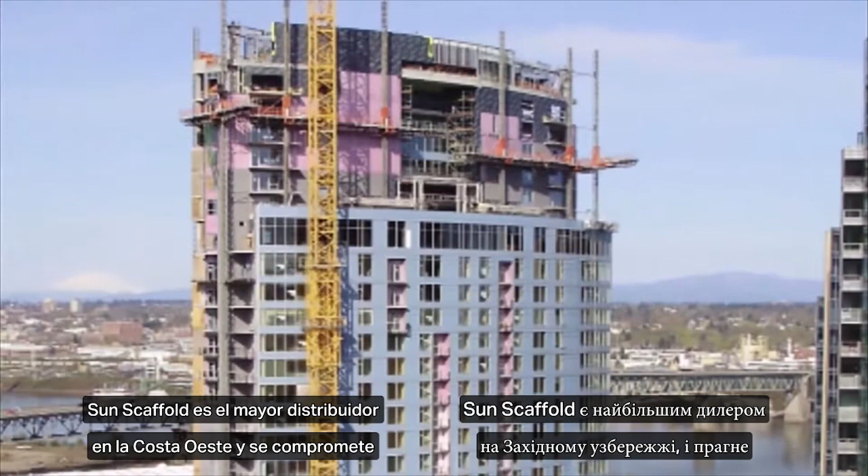Thank you for participating in our Level 1 user training for FRACO mast climbing work platform. Sun Scaffold is the largest dealer on the West Coast and is committed to increasing our safety trainings on an ongoing basis. Whether this is a review or your first exposure to mast climbing work platforms, please help us to train you to be a safer and more experienced, competent worker by focusing your attention to the following training videos.

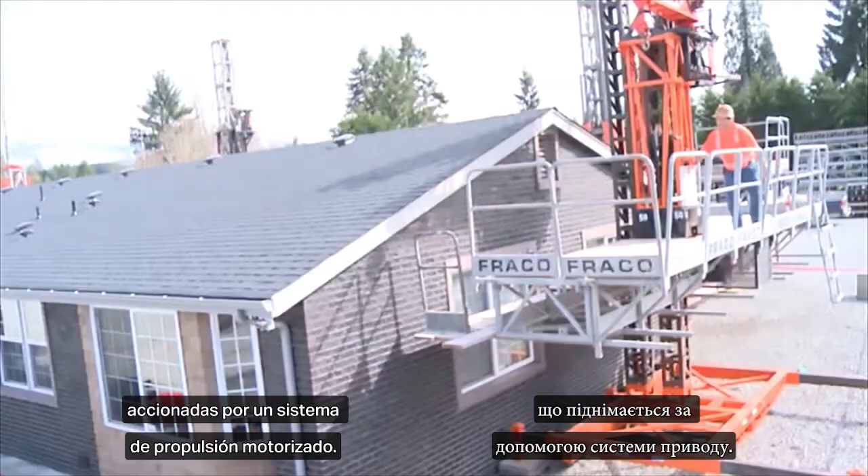Mast climbing work platforms are a single elevation platform elevated by a powered drive system. The drive system is supported and guided by a mast that may or may not require a lateral restraint from a separate supporting structure. Mast climbing work platforms are primarily used to position and give safe access to personnel along with their necessary tools and material to perform their work.

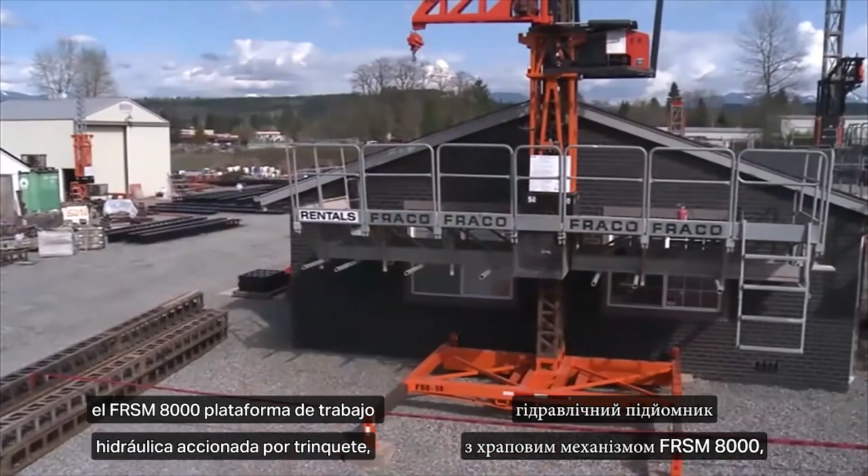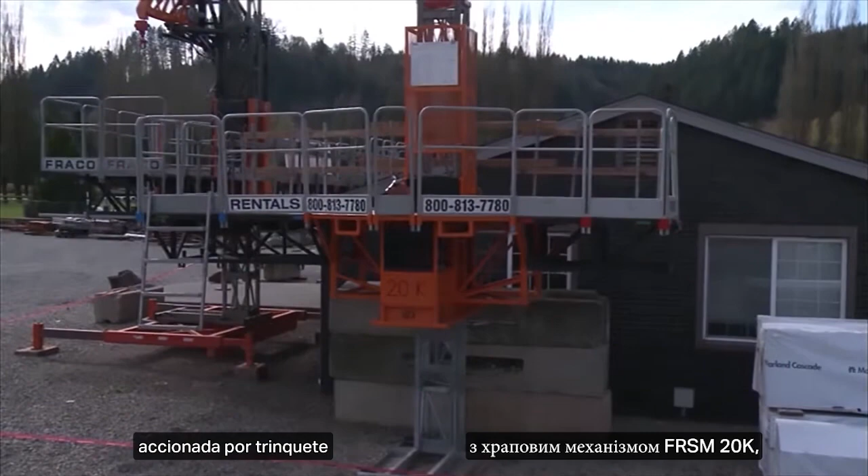The product models you will be trained on today are the FRSM 8000 ratchet-driven hydraulic work platform, the FRSM 20K ratchet-driven hydraulic work platform, and the ACT-8 endless screw-driven hydraulic work platform.

The FRSM 8000 is driven by a hydraulic motor, powered by a detachable gasoline engine pack. It climbs a 12-inch by 12-inch mast with twin ratcheting hydraulic ram sets. The power, drive, and safety release systems are all operated manually.

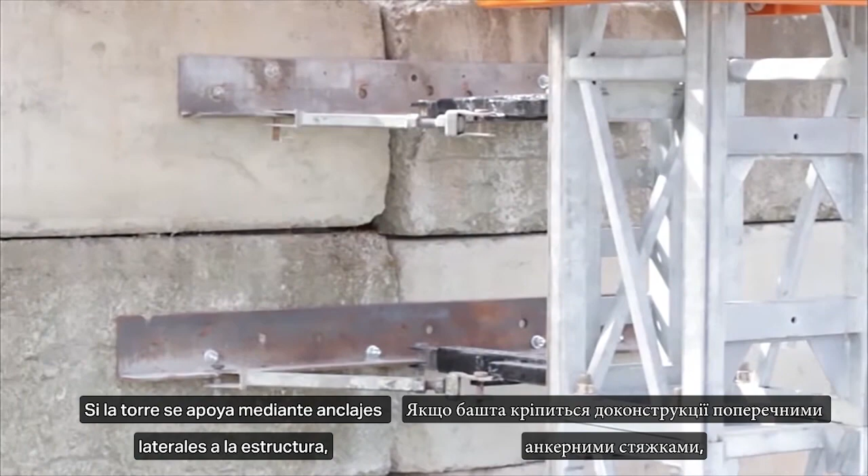The 12-inch by 12-inch by 10-foot mast sections can be coupled together to achieve a 34-foot freestanding configuration. If the tower is supported by lateral anchor ties into the structure, the mast section can be left as a single 12-inch by 12-inch by 10-foot mast. The FRSM 8000 configurations are limited to 36 foot wide for single mast configuration and 105 foot wide for twin mast configuration.

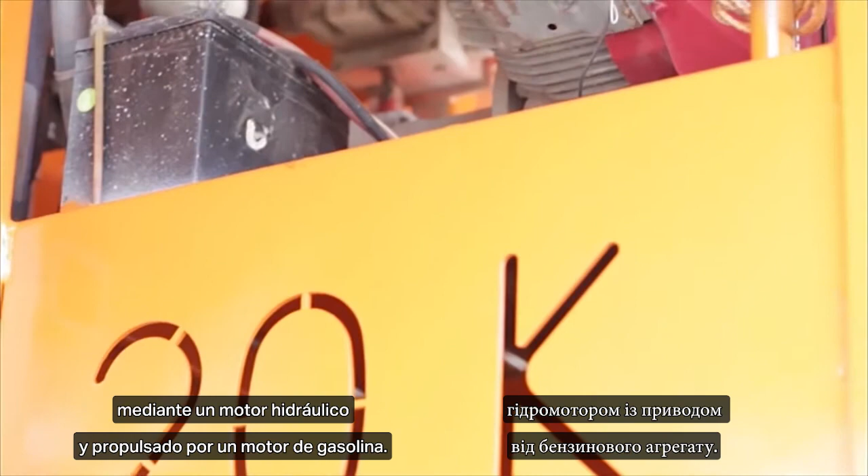The FRSM 20K is driven by a hydraulic motor and powered by a gasoline engine. It climbs a 20-inch by 20-inch mast with a single ratcheting hydraulic ram set. The power, drive, and safety release systems are operated with a combination of manual, combustion, and electrical components.

The 20-inch by 20-inch by 5-foot mast sections allow typical configurations to achieve a 45-foot freestanding height. The configurations are limited to 47 feet wide for single mast and approximately 127 feet for twin mast configurations.

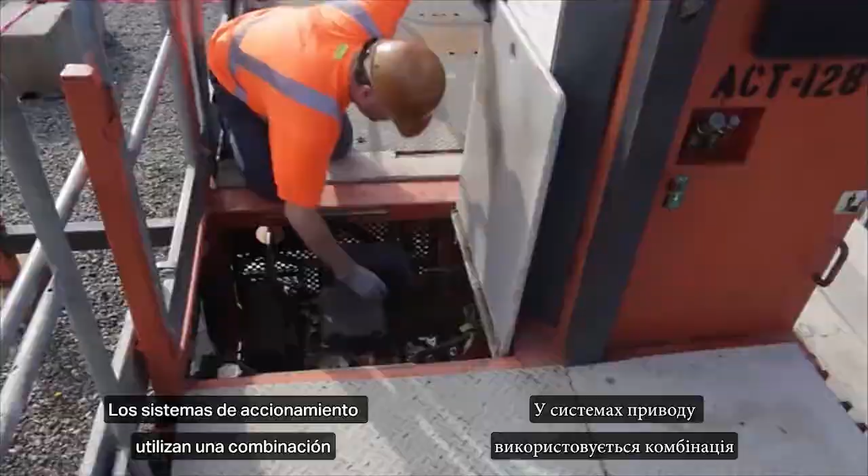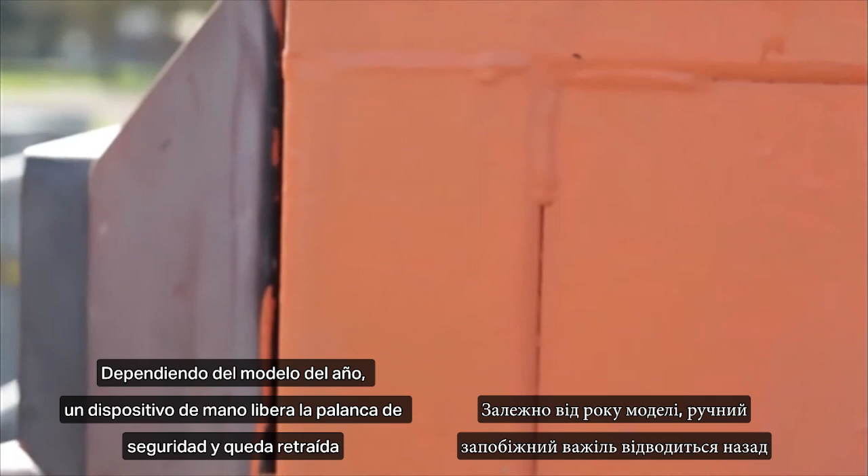The ACT-128 is a gear-driven machine that climbs or descends at a maximum speed of 39 feet per minute. The drive systems utilize a combination of gasoline, hydraulic, and electrical components. Depending upon the year model, a handheld safety release lever is retracted and held into position during the descent mode.

The 20-inch by 20-inch by 5-foot mast sections allow typical configurations to achieve a 45-foot freestanding height. The configurations are limited to 56 feet wide for single mast configurations and 118 feet wide for twin mast configurations.

This Level 1 user training certification will require all trainees to read and speak clear English. If a trainee requires training in a different language, please see the instructor and he will make arrangements for you to attend a bilingual class at a later time.

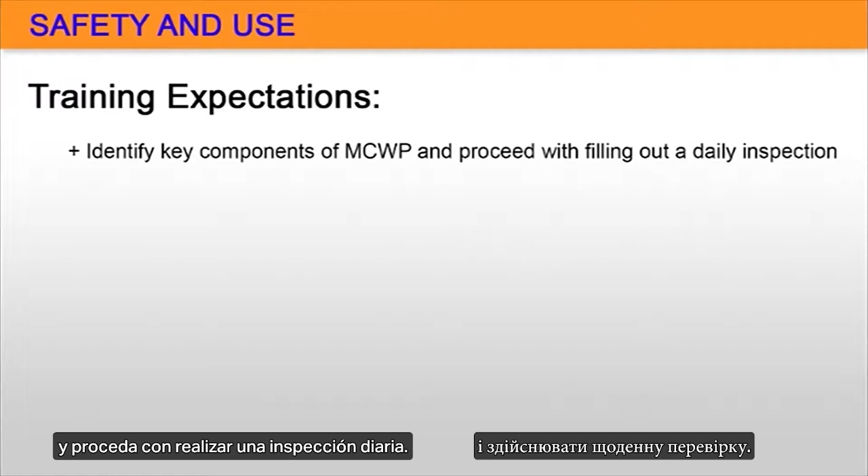This certification will require classroom training, knowledge and possession of the manual information, hands-on training, and a written test. You must pass the test with a 70% grade or higher. As part of this training, you will be expected to know and identify key components of the mast climbing work platform and proceed with filling out a daily inspection.

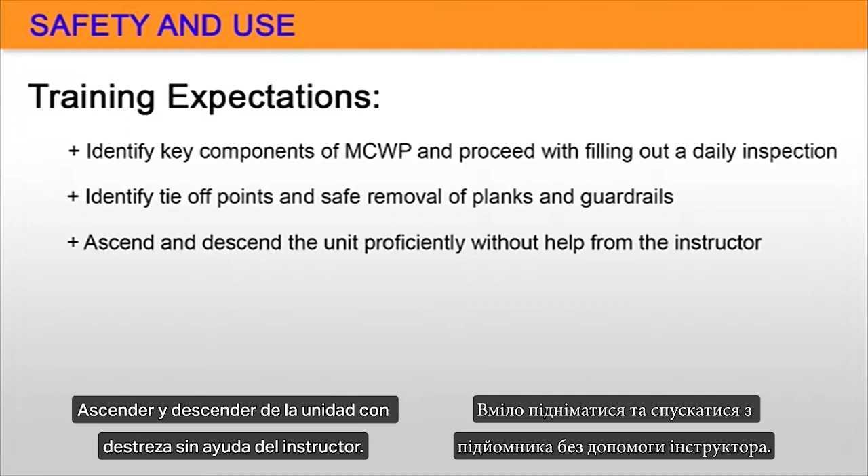Identify the tie-off points and safe removal of planks and guardrails. Ascend and descend the unit proficiently without help from the instructor. Operate the available accessories. Identify the location of the warning panel, and demonstrate the use of the emergency safety descent device when applicable.

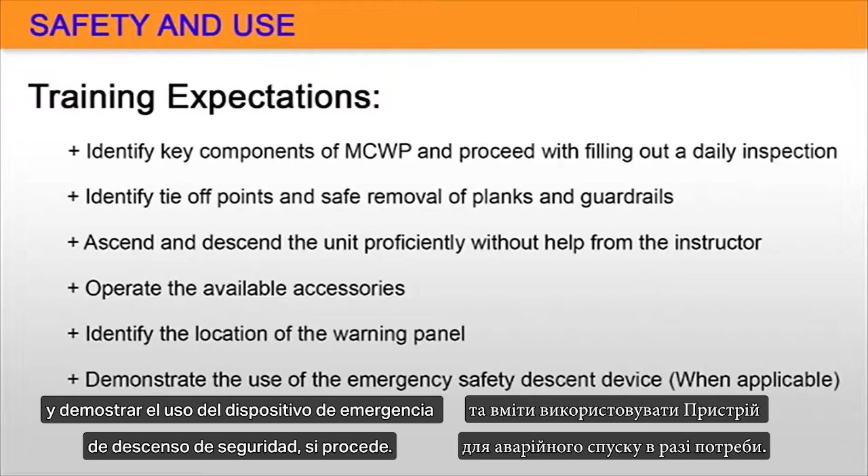Whether you use or operate a mast climbing work platform, everyone should know the definition of and act as a competent person. No alterations or mechanical repairs can be made without proper certification. Each job site will have a qualified person to contact in the case of equipment alterations, damage, or repair.

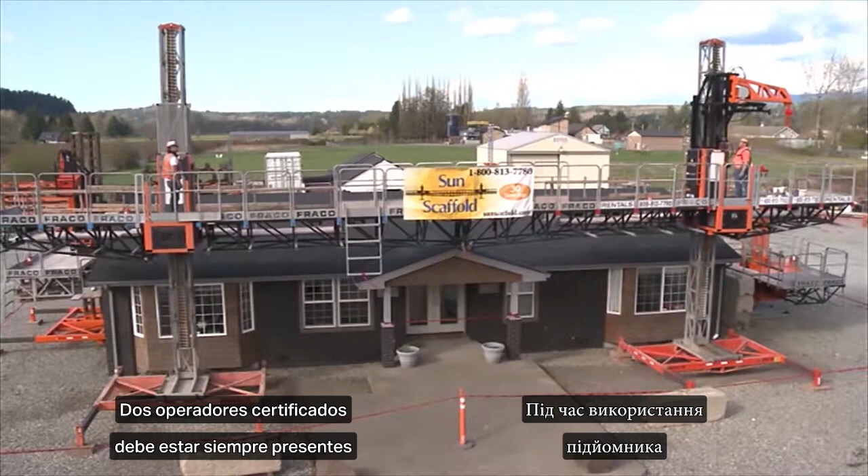A competent person is able to recognize the hazards associated with a particular task and has the ability and authority to prevent those hazards. Only qualified and authorized personnel can operate, install, dismantle, and maintain a mast climbing work platform. Operators are responsible for and should be aware of load capacities, distribution of materials, and the material weights. Two certified operators must always be present during the use of the mast climbing work platform.

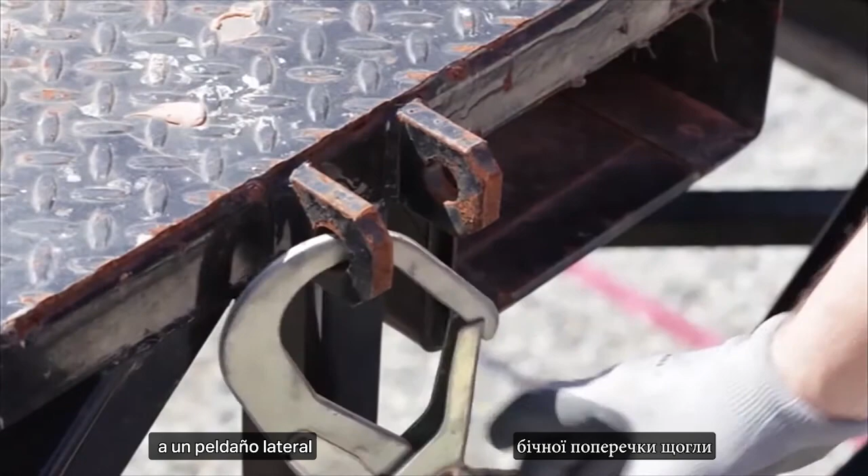You must be properly trained to use your personal fall protection equipment when opening up a fall hazard. There are 3 designated tie-off points to attach your shock-absorbing lanyard to. One person may tie off to the bridge bracket ear, a lateral mast rung, or a motor unit handle. Never use a tie-off point that has been damaged.

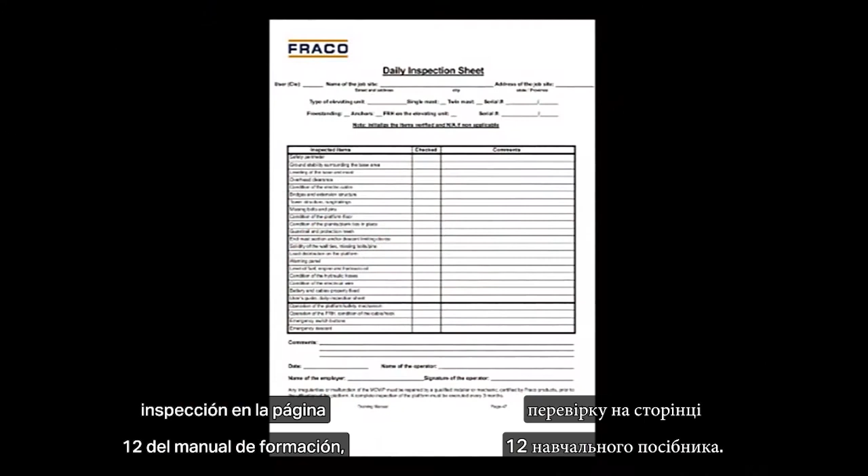When removing or replacing planks, opening the foot plank past the wall tie bracket, or removing a guardrail, a worker should always be tied off until the foot planks and guardrails are fully replaced and secured. Before we review the daily inspection on page 12 of the training manual, let's set it aside and come back to that toward the end of the video training.

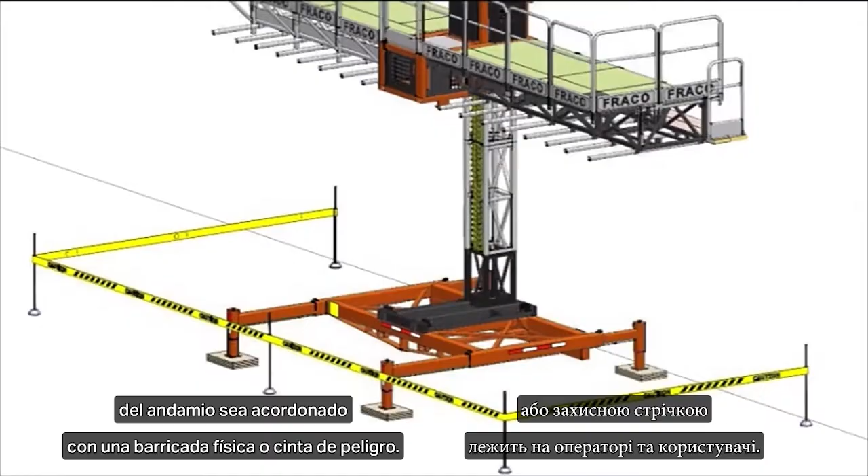It is the responsibility of the operator and user that the perimeter of the scaffold be cordoned off with a physical barricade or danger tape. Materials, tools, guardrails, and planks can fall from the platform. It is also important to prevent the placement of materials or equipment under the platform. A collision with such equipment or material could cause a failure and serious injury.

It is essential that a visual inspection is made of the ground under the surrounding of the base and foot plate. The ground can expand and retract, especially during freezing conditions. When using a freestanding base, make sure that the number of planks does not exceed the distance covered by the front stabilizers of the base. Also, the rear stabilizers must be fully deployed before maximum freestanding height can be accomplished.

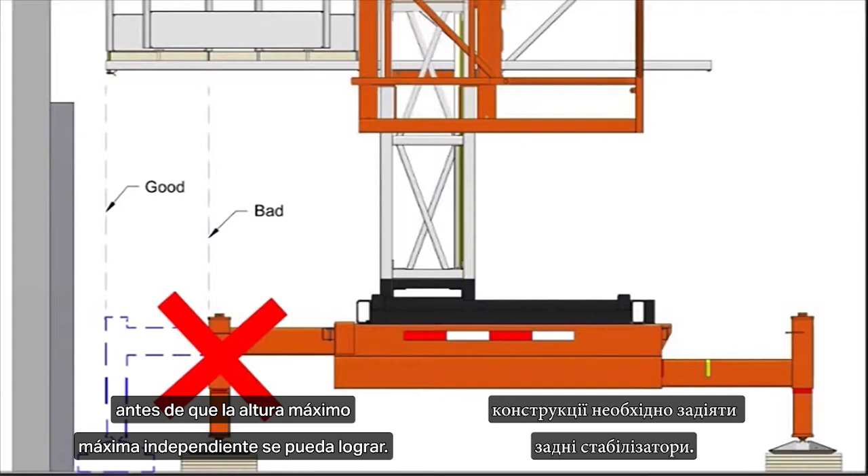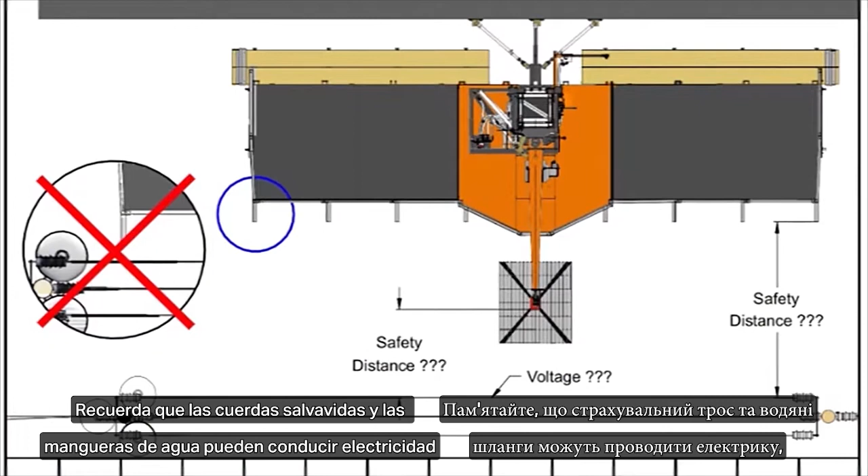It is extremely important to know that the vertical and lateral path of travel is clear from any obstruction, such as trees, power lines, balconies, open windows, cranes, and forklifts. Remember that the lifeline and water hoses can conduct electricity if the platform comes too close to a power line.

It's important to remember that not all FRACO mast climbers will be provided by a scaffold dealer, and throughout the 5-year certification period, you may find yourself working off privately owned and installed equipment from a subcontractor. Human error can always be a factor with missing parts, so be sure to know what you're looking for and inspect at the beginning of each shift. Never use a platform that is damaged or has a malfunction in the operation.

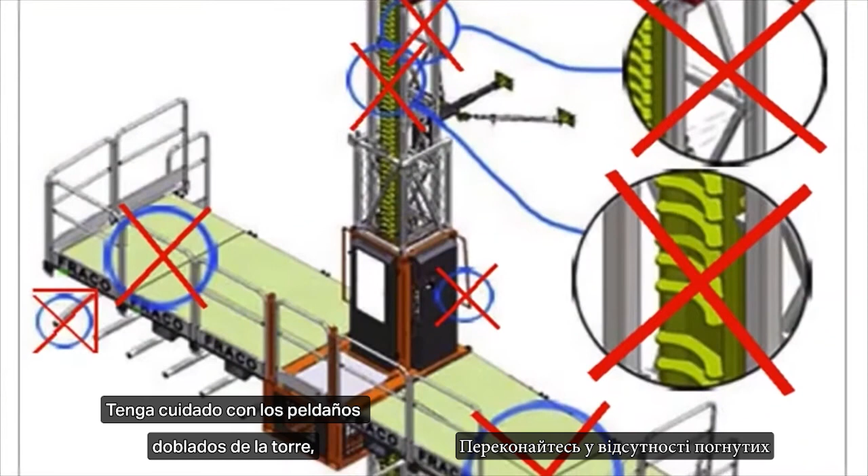Keep an eye out for bent tower rungs, outrigger tubes, guardrails, or bridge trusses. If damage occurs throughout the course of your shift, stop work immediately and notify the qualified competent person on your job site to arrange repairs. If a person neglects to make this notification, his or her certification will be revoked and they may be responsible for costs relating to the damaged repairs and retraining.

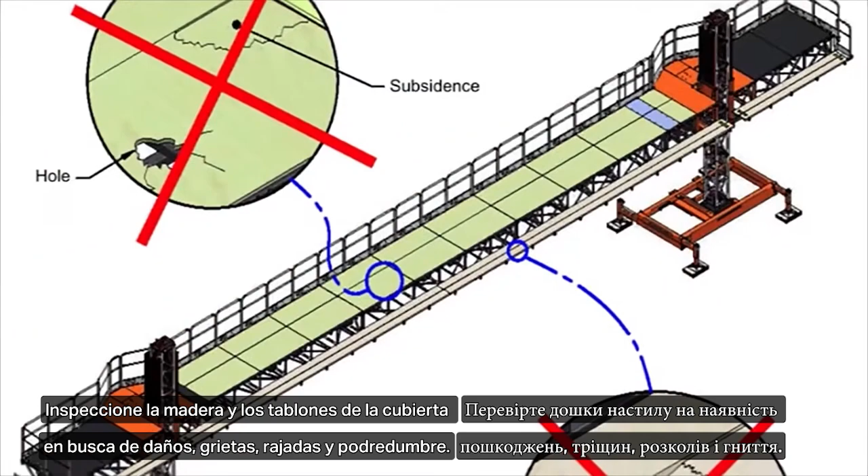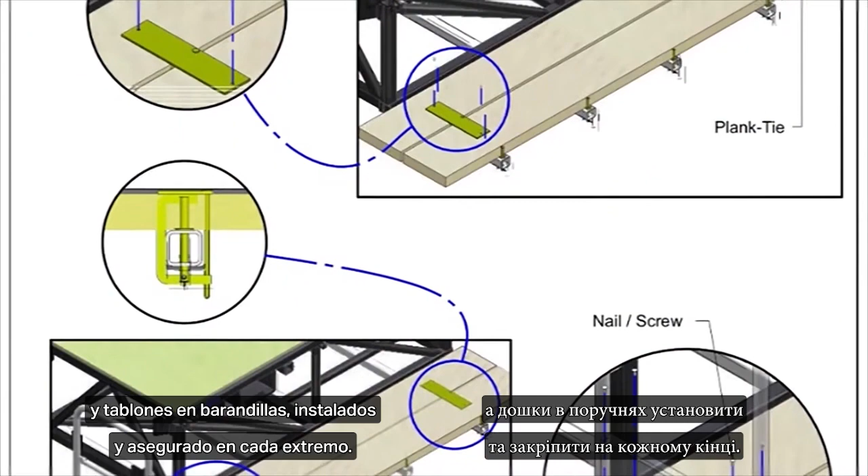Especially in the Northwest, where wet and moldy conditions are the norm, inspect the deck wood and planks for damage, cracks, splits, and rot. Never use a platform with damaged deck wood or foot plank. Most often, foot planks are used to fill in the space between the building face and the mast climbing work platform. The plank can be installed at deck level or at a 20-inch drop for more convenient material access. Plank ties should be used approximately every 10 feet and plank end guardrails installed and secured at every end. Planks can move and sometimes lift off during high winds.

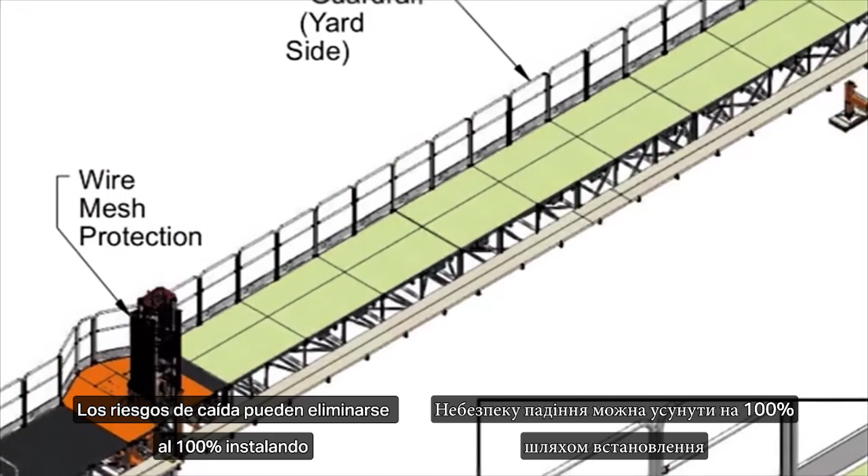If there are no foot planks, or when removing and replacing them while passing through anchoring points, you must always use a fall protection device and be tied off to one of the anchoring points shown on page 10 of this document. Fall hazards can be 100% eliminated by installing guardrails on the deck and platform and at both ends. If the foot plank is properly installed to the face of the building, it can act as the fourth side fall protection. Never lean against or sit on a guardrail.

Protective mesh not only protects workers from a crushing hazard, but helps prevent tools and materials from being bound up during the ascent or descent. This hazard could cause damage to the mast section and stability of the entire work platform. The maximum safe distance between the working surface and the end of the planks is 12 inches. This distance may vary depending upon the trade regulations in your area.

L outrigger brackets should be installed whenever the building side creates an opening or surpasses the top elevation. Every mast section should have a red tower guard on top to prevent roller guides from running off the mast. The shock load could cause a bridge connection to fail. When setting scaffold above pedestrian protection, descent limiting devices must be installed and secured to prevent crushing.

Wall tie anchoring system should always be tight. Be sure to inspect the pins and components when passing by and inform a qualified competent person immediately if a wall tie is loose or missing a pin.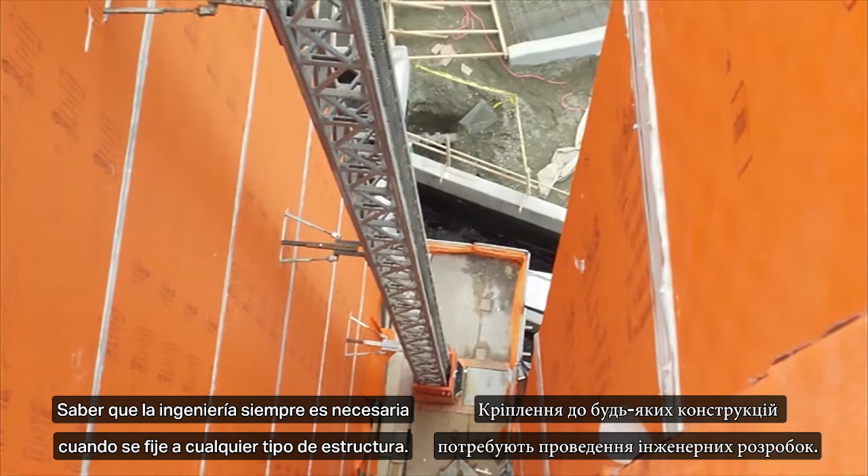There are many different types of wall tie conditions. Know that engineering is always required when attaching to any type of structure. Many materials, such as wood and metal stud, must be reinforced well into the building to support the required loads.

It is very important to know the weight of the material you will be loading on the platform and how to distribute it. Always consult the load chart when loading materials. Depending upon the configuration and freestanding height above the last tie, the capacities can be reduced to a fraction of the typical capacity.

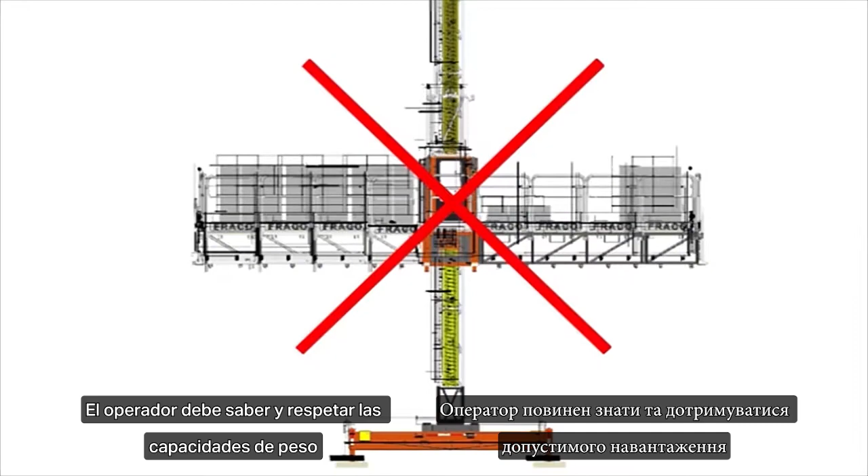On a twin mast configuration, point loads must be placed as close as possible to the elevating unit. On single mast configurations, the point loads must be evenly distributed on both sides of the mast. The operator must know and respect the weight capacities for the type of equipment he or she is using.

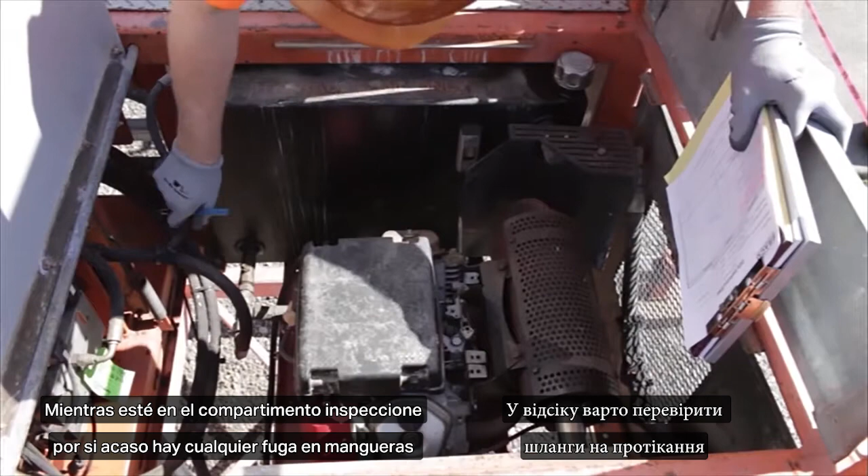The competent person performing the pre-start inspection should always check the hydraulic oil, motor oil, and gasoline level. While in the compartment, inspect for any leaky hoses or poorly connected battery terminals. The engine compartment should be free from material debris. Any other mechanical adjustments should be made only by a qualified, competent person.

A copy of the user manual should and may be located inside the motor compartment. Make sure that the warning panel is in good condition and readable. Look for any other site-specific load charts that may supersede the load chart on the warning label.

In the case of inclement weather, such as strong winds, electrical storms, ice or snowstorms and such, do not use the mast climbing work platform. In the case of an electrical storm, leave the platform immediately to avoid electrocution.

You must not use the mast climbing work platform in a freestanding installation if winds are stronger than 28 miles per hour. You must not use the mast climbing work platform in an anchored installation if winds are stronger than 34 miles per hour. When the platform is not in use, make sure it is positioned between two anchor points.

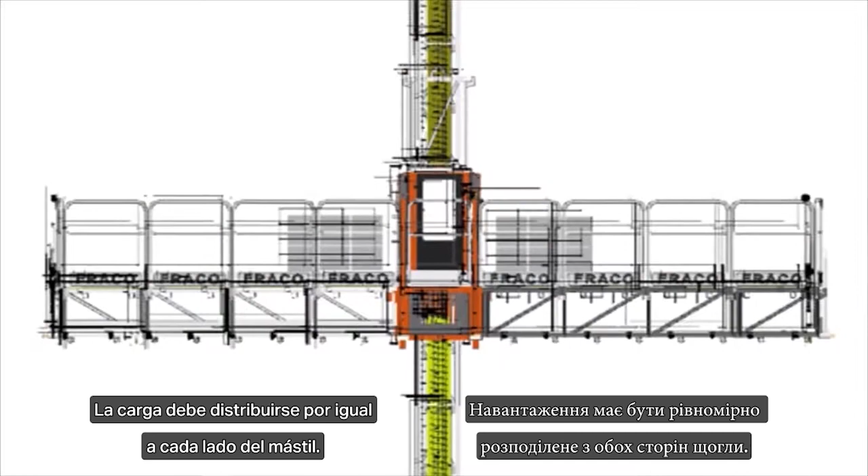If winds stronger than 47 miles per hour are in the forecast, the platform must be brought to its lowest level possible, or at an equal distance between two anchor points. The load must be equally distributed on each side of the mast. Depending upon the configuration of the mast climbing work platform, the load capacity, height, or distance between anchors can change.

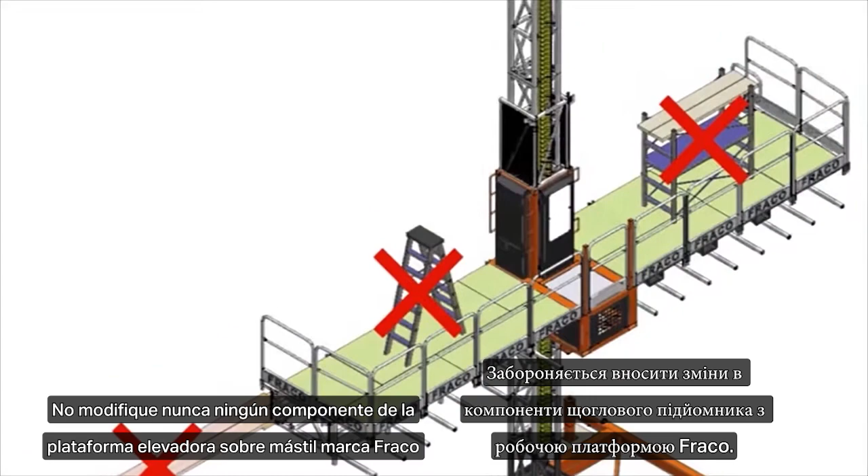It's important to never use any means to extend your working height on the platform. Always position the platform at an optimum working height. Never modify any component of the FRACO mast climbing work platform. All modifications must be performed by a certified Level 2 installer with the permission of their supervisor.

The only time height extenders are allowed to be used is when accessing or egressing the work platform. These systems should always be approved in your site safety plan before use. The weight of a pile of debris is hard to determine and can create an obstruction that jeopardizes the safety of the workers on the mast climbing work platform.

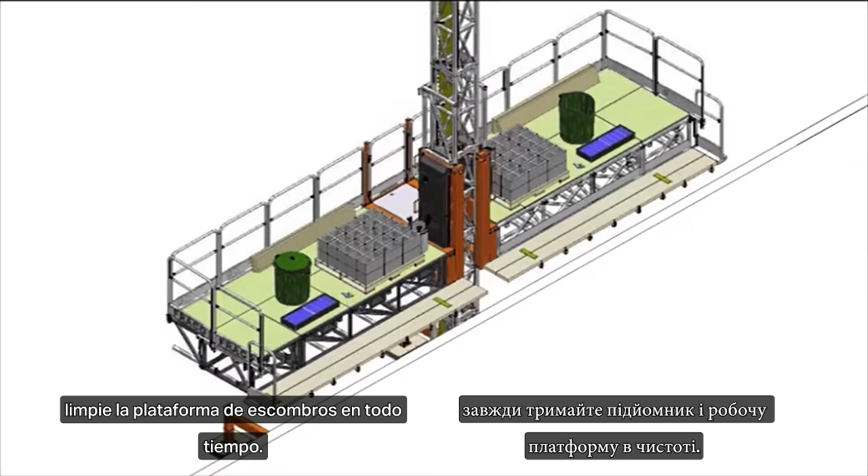Snow that has accumulated on the platform is considered debris and must be removed as well. To prevent tripping hazards and falling debris, clear the platform from debris at all times. The path of travel must be free from anything that can obstruct its movement, such as balconies, ceilings, trees, power lines, and open windows.

It's essential that the operator announces any movement of the mast climbing work platform in a clear, loud voice. Going up! This helps other users keep an eye out for potential obstructions.

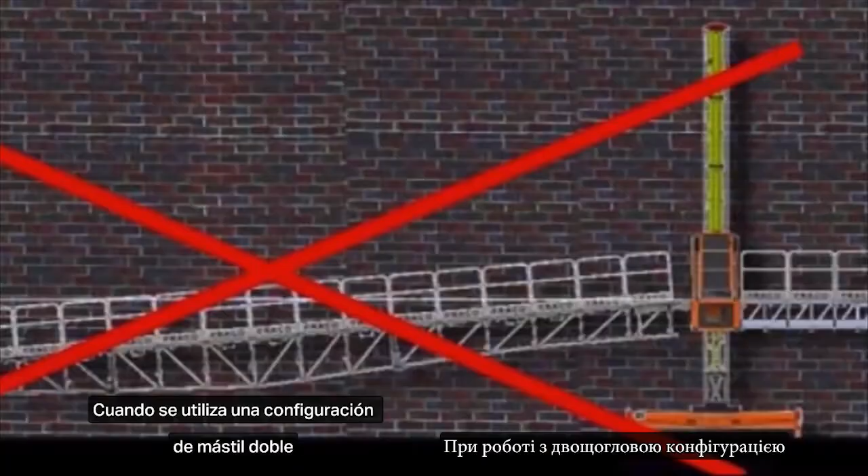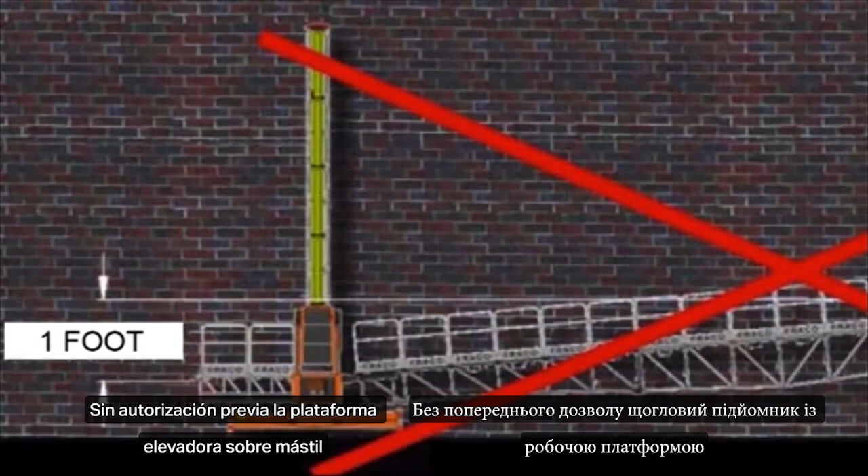When operating a twin mast configuration, keep the bridge as level as possible. The maximum tilt allowed between two elevating units is no more than 1 foot. Without prior authorization, the mast climbing work platform cannot go higher than 5 feet above the last anchor. Never exceed the last anchor when using the FRH portable crane.

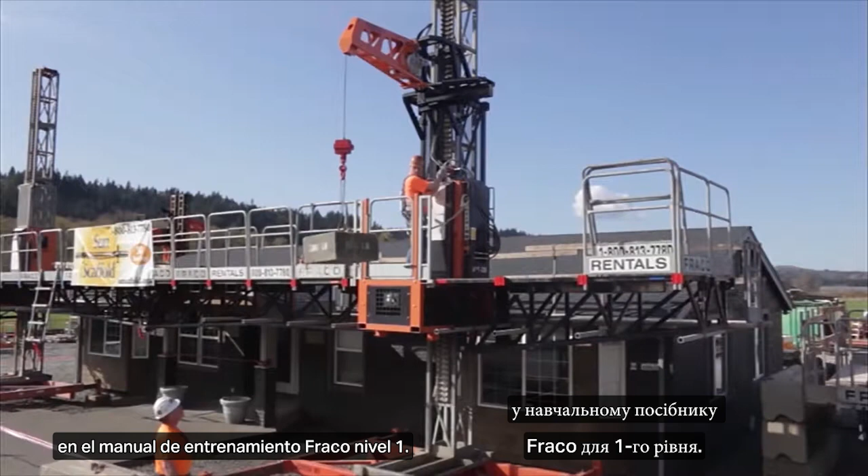The rigging and lifting operation must be executed by a competent person. The FRACO Level 1 user certification does not replace proper rigging training and certification. Please read and know all the information in the FRACO Level 1 training manual.

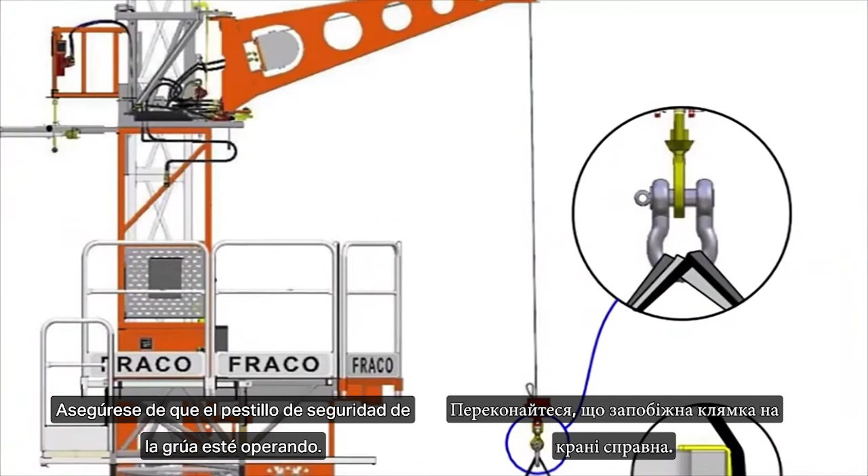Know the weight of the load being lifted as well as the capacity of the crane being used. Make sure that the safety latch on the crane is operational. Make sure the hook, cable, and straps are in good condition.

Make sure the access underneath the lifting area is secured and always abide by the proper rigging regulations in your site-specific safety plan. Good visual contact between the rigger and the operator of the crane on the work platform is essential. Never allow the cable to touch the ground. This could cause a backlash on the spool and damage the cable. Always bring the cable to its initial position when the portable crane is not in use.

Please take a moment to review some of the important safety rules on page 38 of the training manual. It is important that workers are trained on the same type of mast climbing work platform that they will be operating. Each candidate must be trained by a certified trainer and be familiar with the model-specific operation, controls, and user manual.

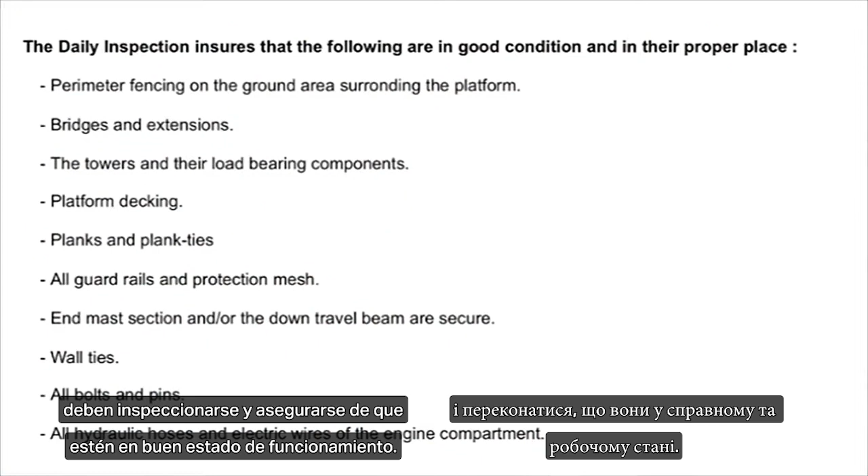The pre-start inspection document should be made at the beginning of each shift and kept on file until the end of the project. The pre-start inspection is broken down into 2 areas that should be considered and inspected simultaneously. First, the equipment along with all of its components and materials should be inspected and ensured that it is in good and operational order. Also, be sure the configuration is used within the manufacturer's written or engineered specifications.

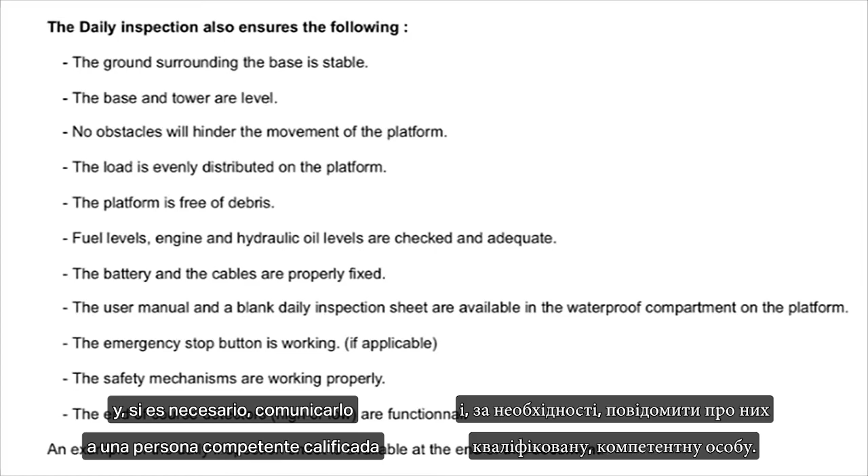Secondly, the site area, obstructions, path of travel, and any overall potential hazards should be observed, inspected, noted, and if necessary, communicated to a qualified, competent person. Please turn to the daily inspection sheet on page 47 of the training manual. Remove this page unless a photocopy is handed to you by your FRACO instructor.

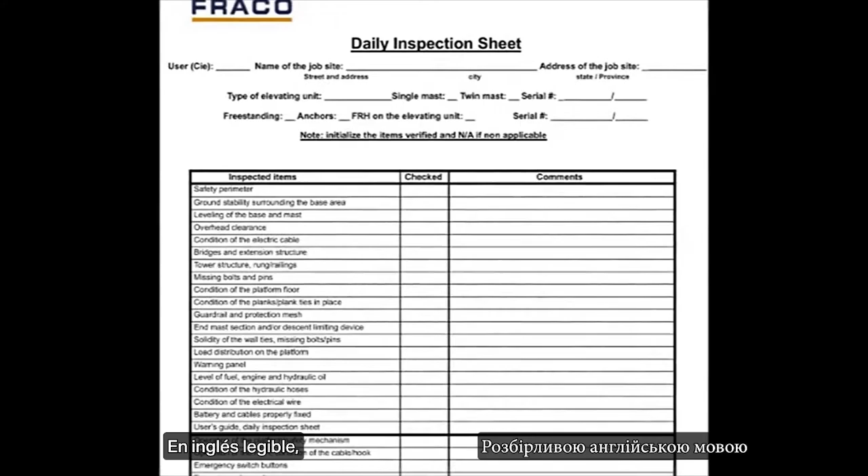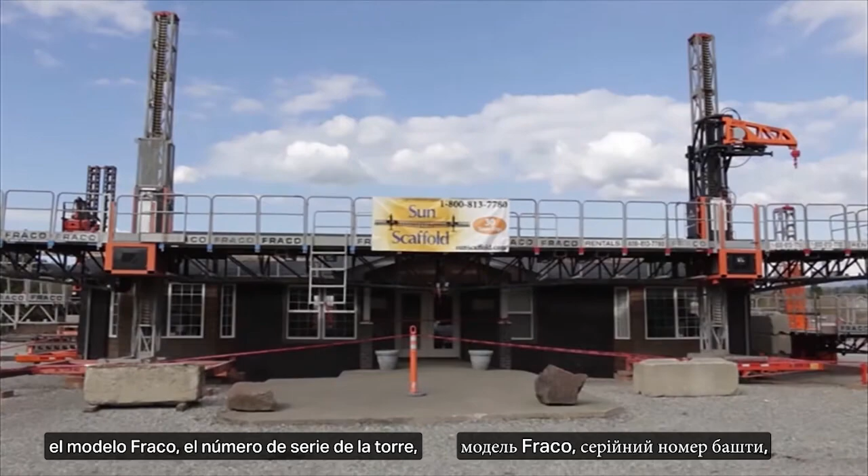In legible English, please fill out as much of the information at the top of the daily inspection sheet. Also, in legible English, please fill out your personal information at the bottom of the daily inspection sheet. As we begin with our pre-start inspection, let's start at the ground level of the overall equipment setup. Fill in the information that identifies the FRACO model, tower serial number, type of configuration, and if freestanding or anchored.

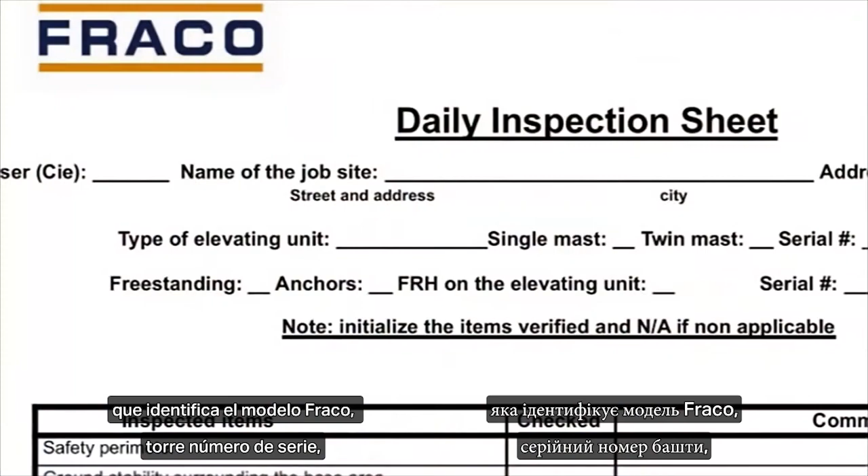As we can see, this configuration is a twin mast ACT8 configuration. The serial numbers on this configuration are ACT128 and ACT130. Now, let's start by taking a look at the perimeter, ground, and base. One of the very first and most important rules is to block off all access to the area below the work platform with red danger tape or some type of barricade. Make sure there is proper signage to communicate the hazards of men working above. Be sure to block access from the interior structure as well as the exterior.

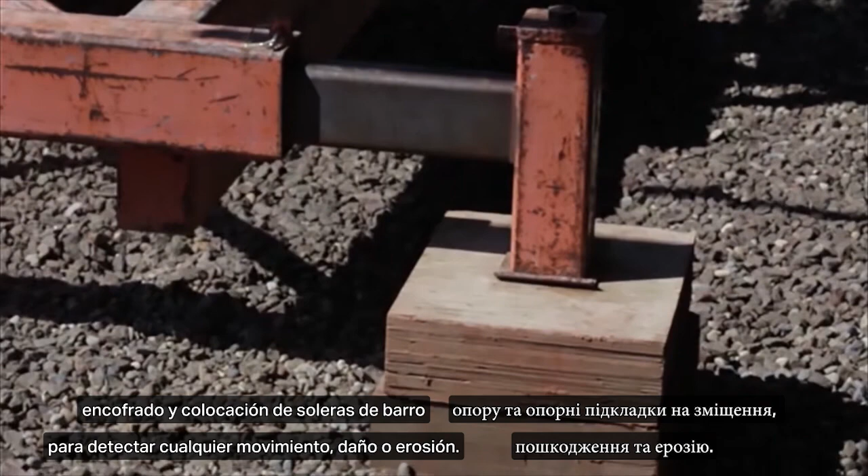When inspecting the base, look at the overall condition of the base. If there is clutter or debris blocking the view of the base, be sure to clear it away so that a proper inspection can be made. Keep an eye out for any hydraulic oil or stains around the base that could identify a potential leak. Inspect the ground, cribbing, and mud sill placement for any movement, damage, or erosion. If you suspect any movement, make the proper notations on the inspection sheet and notify a qualified competent person to ensure the level and stability.

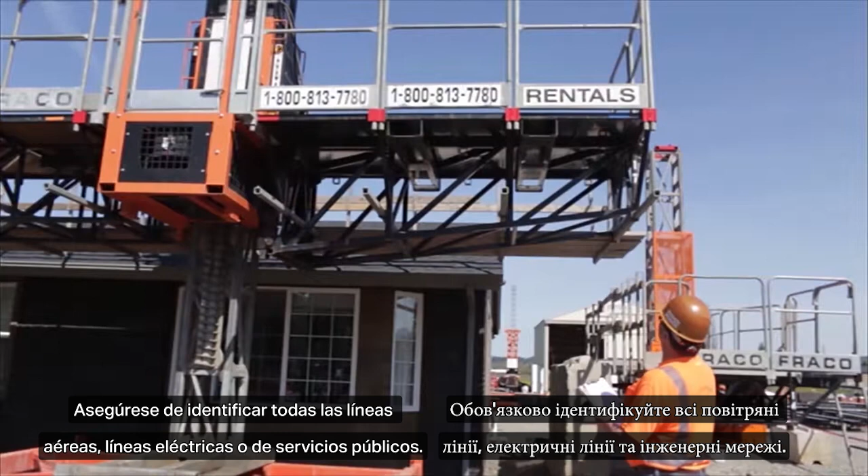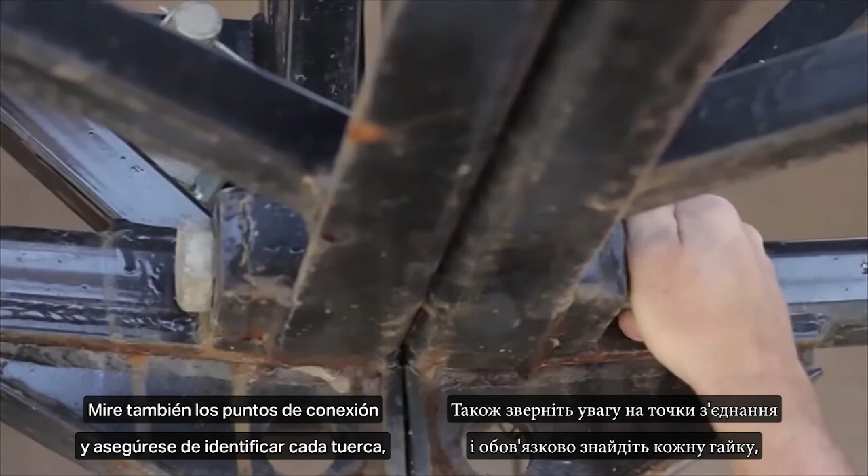Be sure to identify all overhead electrical or utility lines. Proceed to look for any potential obstacles that could obstruct the mast climbing work platform's path of travel during both ascending and descending operations. Still inspecting from the ground, if possible, look for any bends or cracks in the mast, bridges, and extensions on the steel structure. Look into the connection points as well and be sure to identify every nut, bolt, pin, and clip that secures these components. If the mast climbing work platform is elevated in the air beyond a point of proper inspection, please inspect from topside in a safe manner.

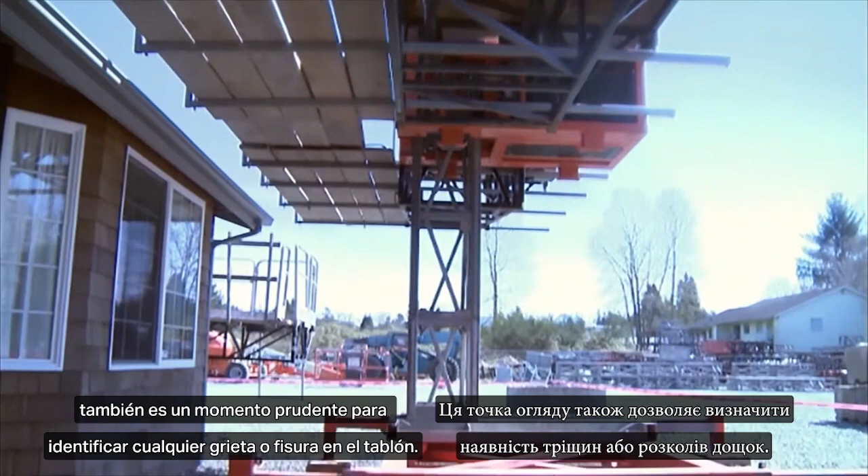Jumping ahead just a bit, this is also a good time to inspect for a descent limiting device in the case of a crushing hazard. Before you transition from the ground and access the top side of the mast climbing work platform, inspect the underside of the foot plank to ensure a minimum 6 inches of lap onto the outrigger tube support. This vantage point is also a prudent time to identify any cracks or splits in the plank. Once you have accessed the work platform topside, be sure the location and weight of the materials are loaded properly and within the capacity of that specific configuration.

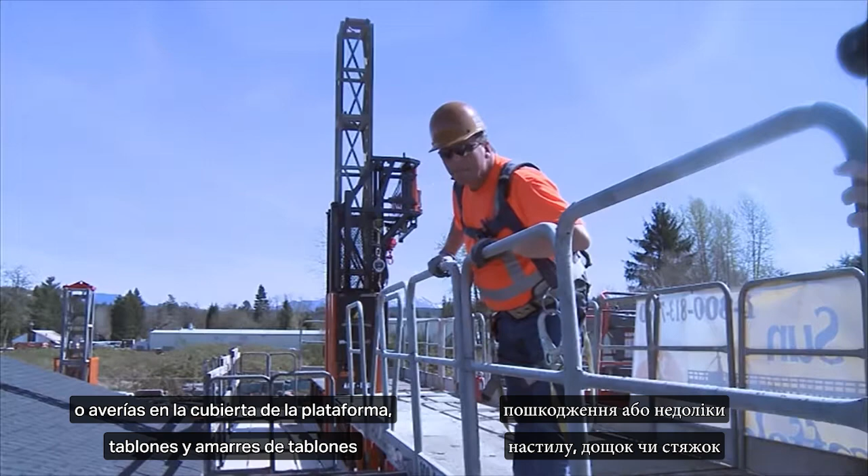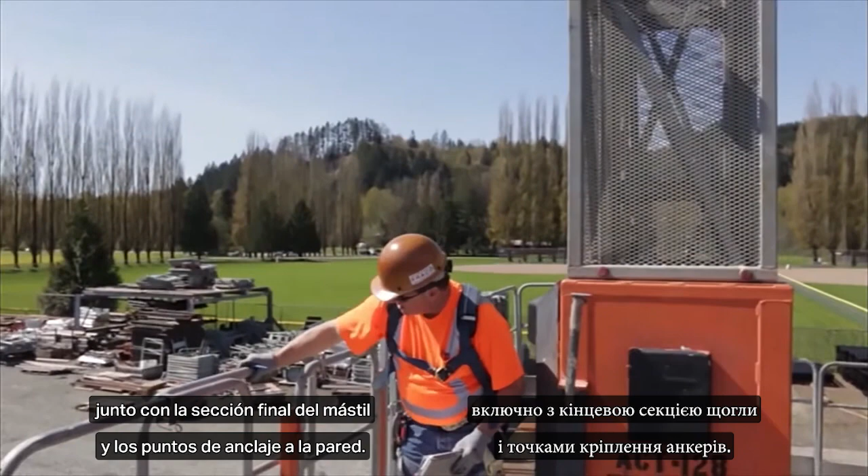Continue to inspect and note any damage or malfunctions on the platform deck, planks, and plank ties when inspecting the mast area of the elevating units. Identify that the protective mesh and the warning panel are in good condition. Then inspect the condition of the mast sections themselves along with the end mast section and the wall tie anchor points. These components especially should be inspected on an ongoing basis.

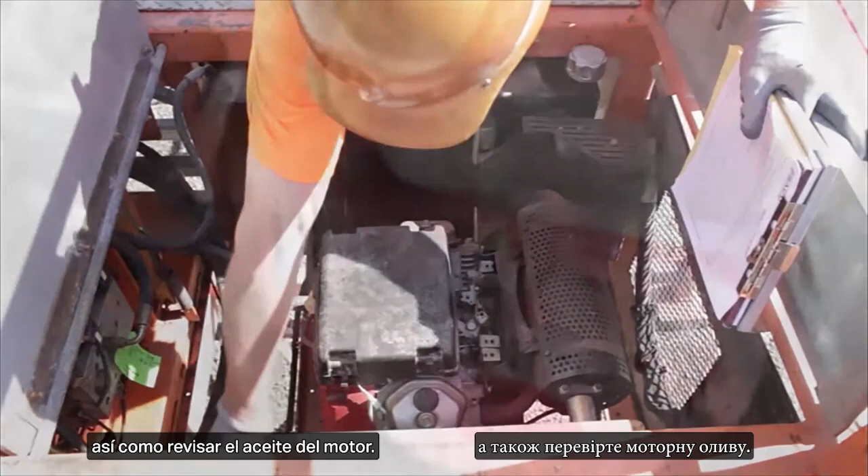It is important to top off the gas level at the beginning of each shift. Continue to inspect the sight glass of the hydraulic oil tank as well as check the engine oil. All three of these lubricants can cause an engine to quit, and you don't want to get stuck in an unsafe position by an engine failure. While you are in the engine compartment, inspect the battery cable and any other electrical wires that they are in good condition.

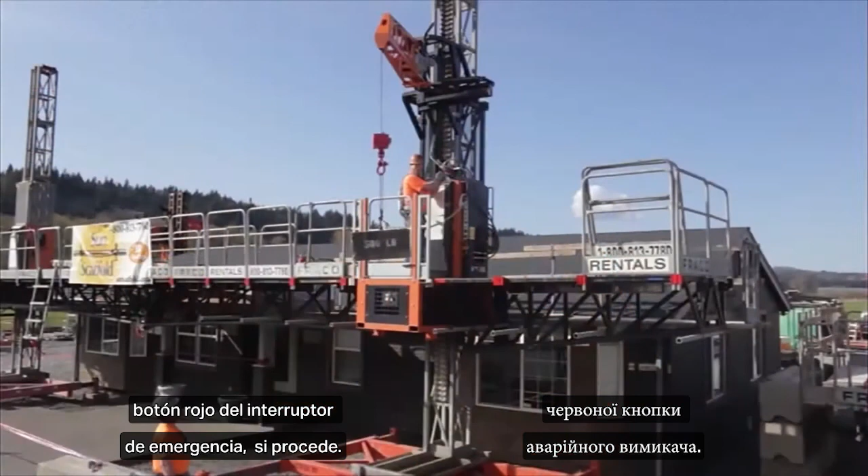Also, check the hydraulic hoses and fittings for any leaks or cracked hoses. Do not attempt to make any repairs yourself. Every elevating unit should have a copy of the product-specific user manual. This manual is located in or around the engine compartment. At this point, we are ready to start the test and operation of the elevating unit. Be sure to test the operation of the red emergency switch button if applicable. If a crane accessory is installed, be sure to inspect the condition of the cable and hook.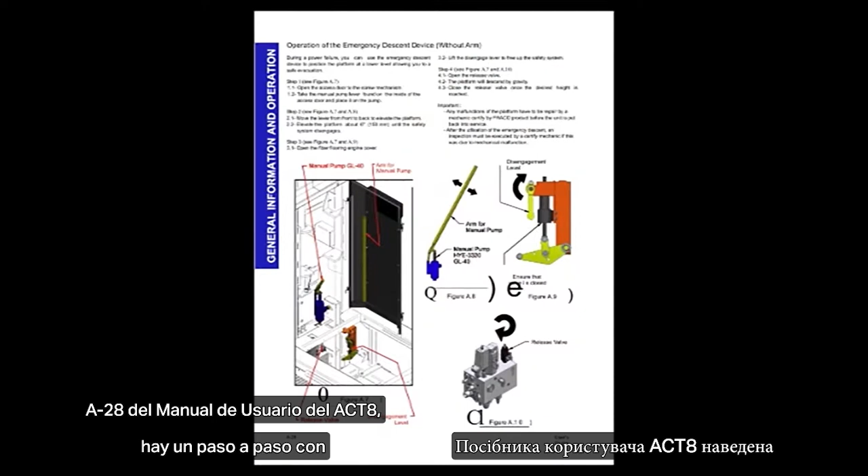During a power failure, you can use the emergency descent device to position the platform at a lower level, allowing you a safe evacuation. This device is not functional on all models and is specifically available on ACT-8 elevating units. On page A28 of the ACT-8 user manual, there is a step-by-step instruction on how to operate the emergency descent device. This procedure will be demonstrated during the hands-on portion of this training.

After completing the daily inspection, you simply start the Honda motor by pulling the manual cord in the engine compartment. You might have to deploy the choke if it doesn't start right away. While the engine is warming up, take a moment to walk the length of the platform and make sure there are no obstacles in the path of travel. Then, in a loud, clear voice, announce to the work crew the direction you are about to move. You might need a spotter in the case there's a blind spot. In a loud, clear voice, say, "Going up!"

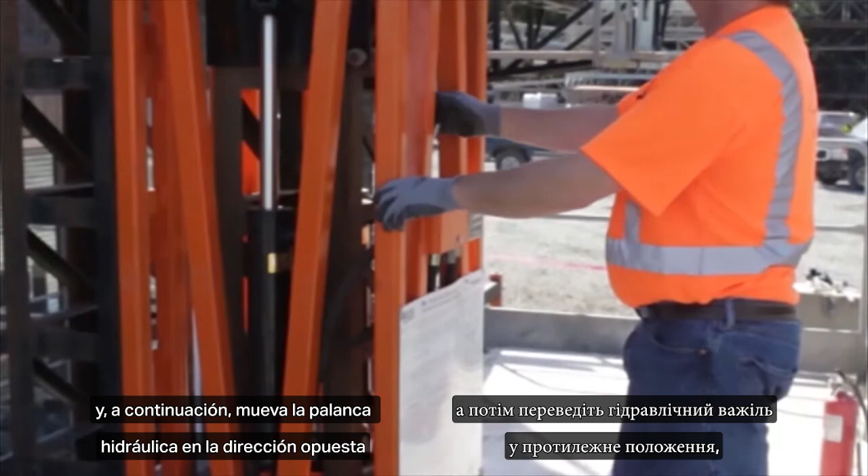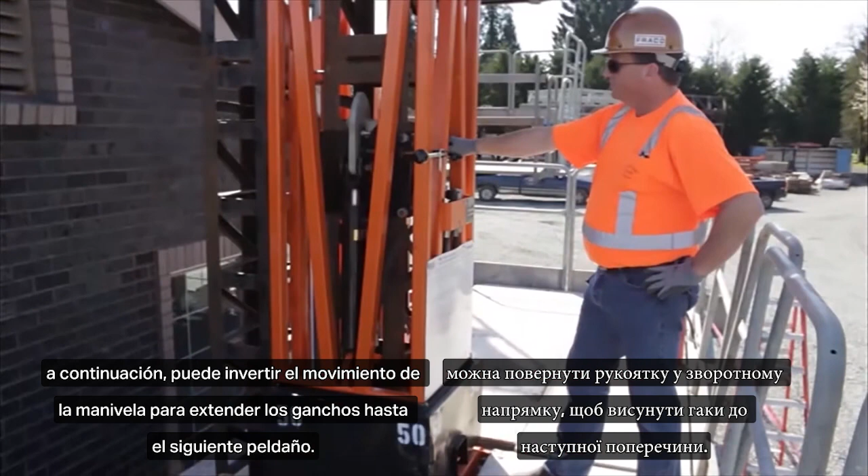Then, engage the hydraulic lever to extend the climbing hook mechanism to the next rung. Be sure to visually inspect that the hooks are fully seated on the rung, and then move the hydraulic lever in the opposite direction to climb the work platform to the next safety dog position. Once the hydraulic ram is bottomed out, you can then reverse the handle motion to extend the hooks up to the next rung. Repeat this action till you get to your desired elevation.

Once you have reached the desired elevation height, release the pressure off the climbing hook mechanism and allow the full weight of the platform to rest on the safety dog. Never hold the platform weight on the climbing hooks while not in operation. The best position for the climbing hook is for the climbing mechanism to be retracted in order to minimize damage and exposure to the ram.

To perform the descent operation of the FRSM 8000, repeat the startup and warm-up routine if at the beginning of a shift. When bringing the platform all the way to the ground, be sure to inspect the area below the platform. You may need to ask someone on the ground to inspect for obstructions, as they will have a better vantage point. Many times, pallets of material or equipment will be placed in this area because of the open available space. Engage the hydraulic lever to lift the elevating unit off the safety dog.

Then, depress the safety dog foot pedal while you engage the hydraulic valve into the down position. Once the elevating unit has lowered past the original rung, approximately 6 inches, you can then release the safety dog pedal so it will stop on the lower rung. Keep retracting the climbing hook valve until the hooks are completely off the rung. Disengage the hook seat by pulling the release handle as you retract the hydraulic valve. Then, re-engage the release handle and seat the climbing hooks on the lower mast rung.

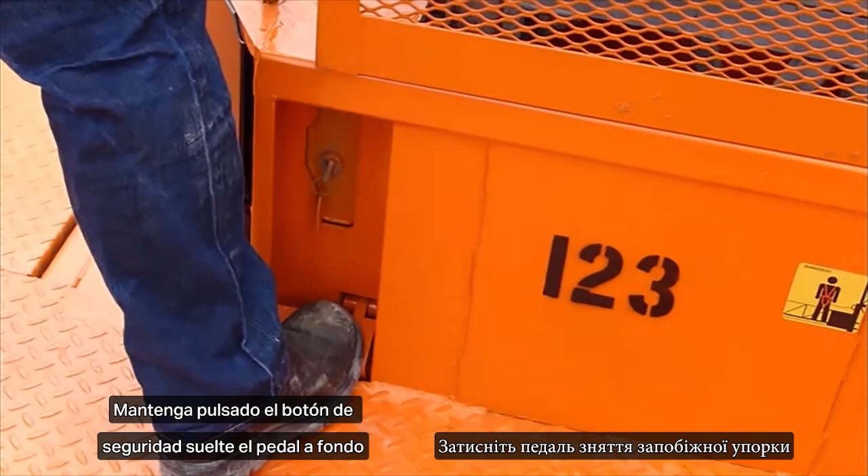Once again, you must announce to your work crew that you are going down. Going down! Now, starting from the lower rung, engage the hydraulic lever and lift the platform off the safety dog. Depress and hold the safety dog release foot pedal fully and engage the hydraulic valve handle in the down position. Once you are past the intermediate safety dog latch, you can then release the safety dog release foot pedal.

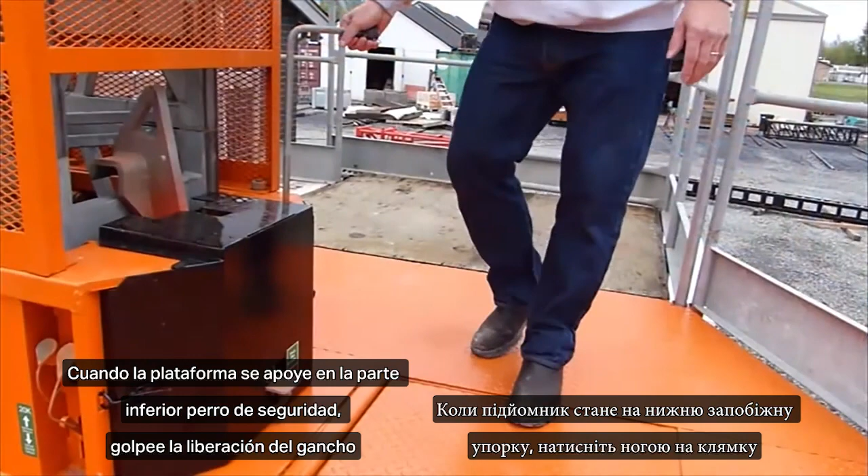As the platform comes to rest on the lower safety dog, tap the hook release latch with your foot and the hook will automatically let go of the top rung. Engage the hydraulic lever to retract the climbing hook and it will seat onto the lower rung. Repeat this process as many times until you get to your desired position. When you are at your desired working height, rest the platform on the safety dog and step on the hook re-engage pedal.

The ACT-8 is also a key start machine. The choke must be pulled out from the engine compartment. Once you have the engine started and warmed up, announce "Going up!" Going up! Simply press the up button and you will climb in a continual motion until you have reached your desired height. Once you are at your optimum working level, depress the pressure relief button and allow the platform to rest on the safety dog.

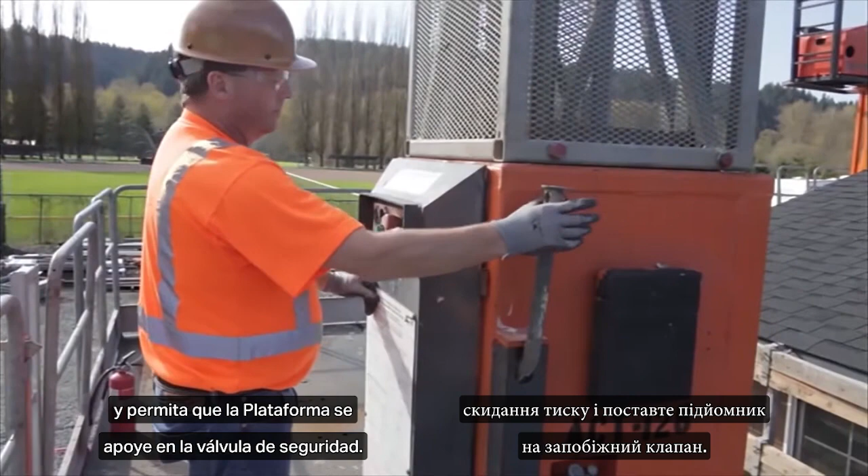Be sure to turn the ignition key into the off position. By killing the engine with the red emergency stop button and leaving the key on, this can drain the battery power.

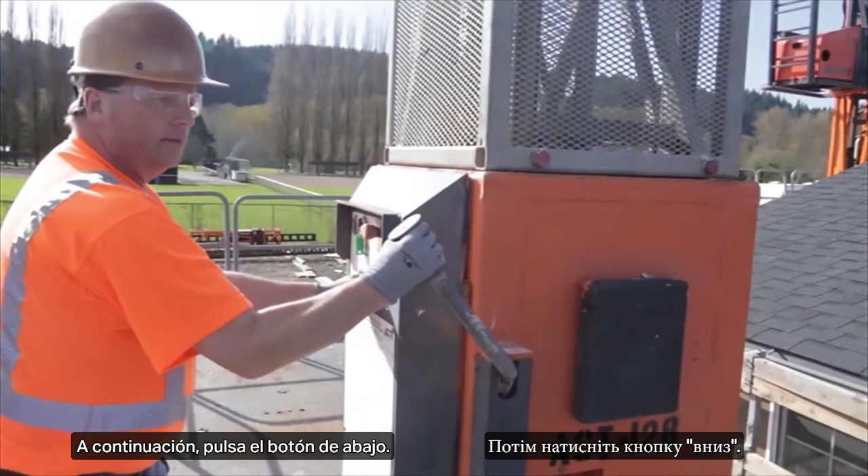Following the same engine startup routine and having the engine ready and warmed up, announce "Going down!" Going down! Press the up button to lift the platform off the safety dog. At this point, pull the safety dog lever completely back and hold. Then, press the down button. As the platform lowers, keep backward tension on the safety release lever.

Note that the lever will force itself forward a few inches every time it passes a dog on the tower rung. This happens approximately every 6 inches, so simply keep backward pressure on the lever. Once you are at the optimum position, fully release the safety dog lever and allow the platform to rest on the safety dog. Likewise, turn off the engine in the same manner as before.

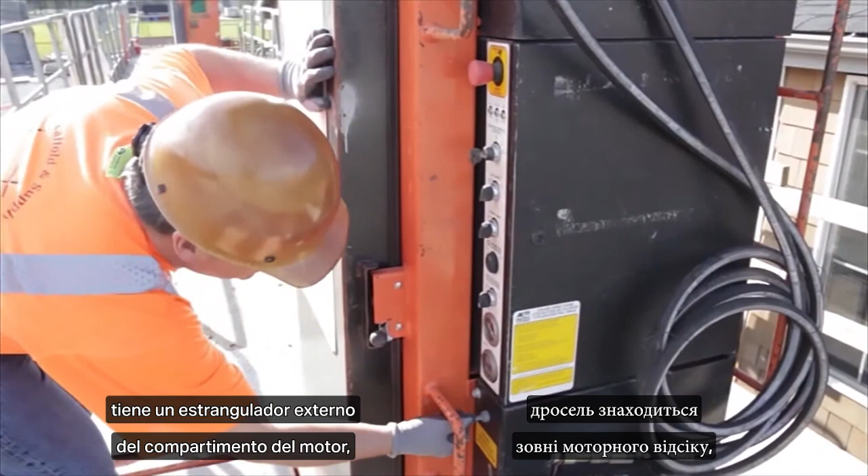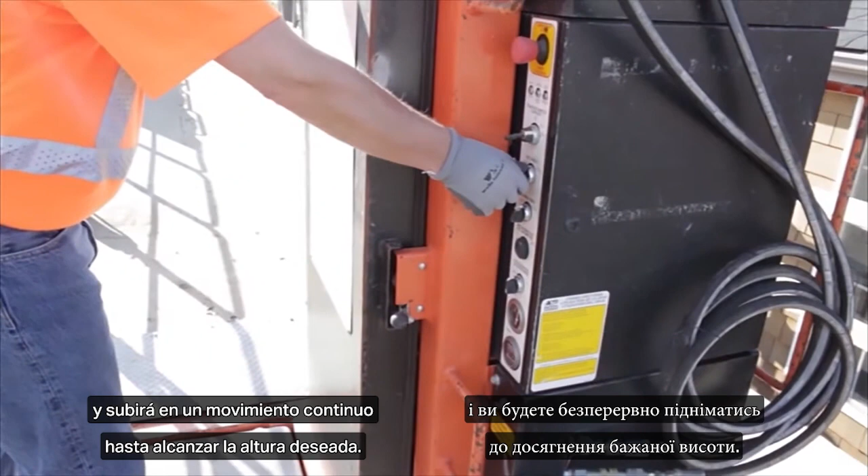The earlier year model ACT-8 has a choke that is external from the engine compartment. So you will simply turn the ignition key into the start position and when the engine's warmed up, press the choke lever in. When ready, announce "Going up!" Simply turn the up button and you will climb in a continual motion until you have reached your desired height. Once you are at the optimum working level, the hydraulic pressure will automatically bleed off until it rests on a safety dog.

Like the going up start routine, repeat that process until the engine is warmed up. Since this elevating unit has an automatic safety dog release, after you have announced "Going down," simply turn the down button. The elevating unit will automatically lift off the safety dog and proceed down until you reach your optimum working level. Allow the hydraulics to bleed off the pressure until it is fully rested onto the safety dog, then simply turn the key into the off position.